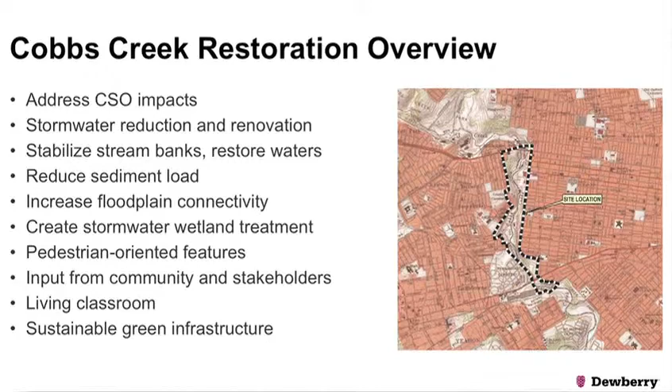It's centrally located. It makes a great opportunity for a classroom and to bring the younger folks in and provide that educational component and get their feet wet and get involved in the project. And they're already doing some things, and so there'll be opportunities as well, and do it in a sustainable manner. I mean, that's typically the approach. So.

Now here you can see, again, we're looking at a watershed approach, and our process in looking at this project and determining what the appropriate fixes are. You really need to take a step back in time and determine what has happened to provide those alterations, get a full understanding of that before you can begin to apply the fixes. And that's something that I do regardless.

Whether you're doing a small rain garden or a large stream restoration, you really need to go back, particularly in these urban areas where there's been a tremendous amount of alteration, because again, you need to fully understand what has changed.

If you're going to be trying to infiltrate within a rain garden, you need to understand: are you going to be infiltrating into bedrock because the ground was up here and it was lowered at some point in time, or has that all been filled? So what's the expectation in terms of the infiltration rates, and what you can do and where you can do it based on some of those constraints, as well as the historical and archaeologic issues that you deal with.

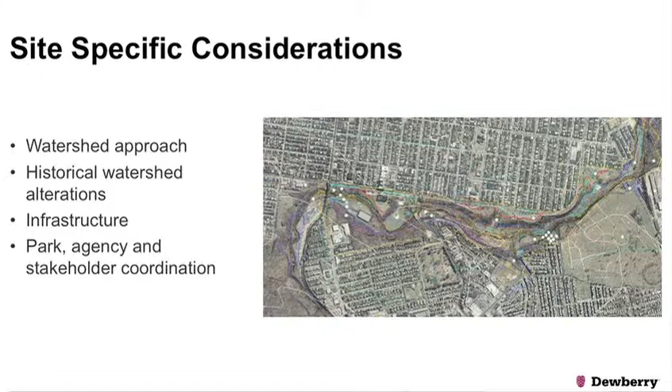And that's historically the way the City of Philadelphia, many of the major metropolitan areas, New York City, pretty much any of the large older municipalities or large metropolitan areas were developed in that manner. You've got to go back in time. Back in the day, they would take the waste material, throw it out into the street, or throw it into the back, had outhouses, whatever, and it was a sanitation issue.

So you developed a sewer system that would treat that. So you take the low points, which were the stream channels, and they were already fouled anyway by that point, and so those became the areas where the construction took place for those combined sewer discharges.

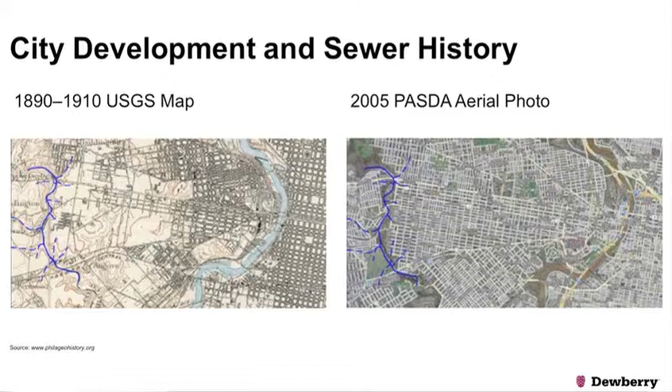And again, looking at the geology of these areas, this is all underlain by Wissahickon schist. Wissahickon schist is a metamorphosed material that weathers down. It's a rock that has been compressed and ultimately then weathers, and it's termed rock flour in a lot of cases. So it's deeply weathered, and when I say deeply weathered, it can be 20, 30 feet deeply weathered, or it can be 8, 9 feet.

But in some cases, I've been involved in highway construction projects where it's weathered as much as 90 feet, and you're trying to put a structure on that, and it gets interesting. But anyway.

And here again, you can see the process of development, the historic streams that existed. This is the Schuylkill River here. That's the Delaware. Oh, you're right. Here's the Schuylkill at this location, and Cobbs Creek is over on the extreme left-hand side here. So you've got the Delaware and the Schuylkill in this location.

But again, historically the stream patterns, and then currently the combined sewer discharges and outfalls. And you can see how that process developed, taking those streams and creating those combined sewer culvert arches: put a form in there, lay the bricks, and concrete the bottom or brick the bottom.

And these discharges would work their way down, and then when they hit the edge of the stream, there's a parallel interceptor. The parallel interceptor is another sewer line, or sewer lines that run on either side of the stream. And under low flow conditions, the material out of those major combined sewer outfalls drops into those smaller parallel interceptors on its way to the sewage treatment plant.

What happens under major storm events is you've got the inlets feeding into the combined sewer system, and you've also got the sewer system feeding into that combined system. It overloads the parallel interceptors, and at that point it backs up in the parallel interceptors and discharges to Cobbs Creek at each one of the 5 combined sewer outfalls. So this was the process that was used to develop these areas.

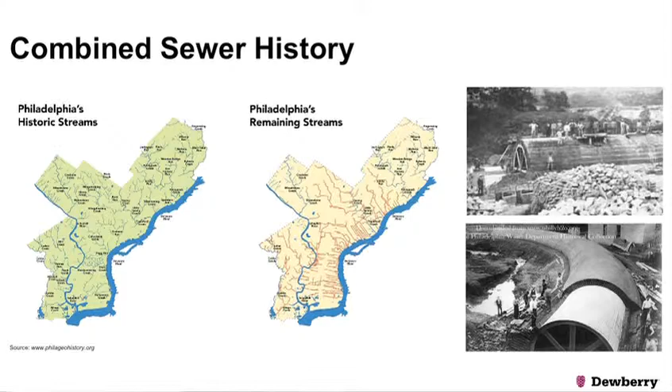Going back historically, what made this possible is that Wissahickon schist material. It's a weathered material. You see pictures of them building brick sewer manholes 20 feet up in the air. What's that? Well, you shave off the high spots because you could readily excavate this material by hand. You put it in a dump cart, and they paid a nickel per single axle, horse-pulled wagon cart.

They gave the fella a nickel, and he might have gotten several loads a day, but anyway, you would bring that and they would fill around the manholes, and that created the level area and shaved off the high spots. And again, that was all by design and by city plan. A plan was developed, and the area developed accordingly, and the sewer and water system to support that infrastructure. And again, that's how a lot of the major metropolitan areas developed.

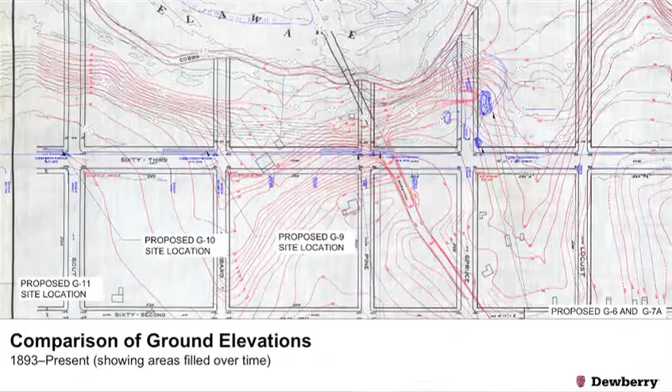And again, here in this location, these subsurface systems, you can pretty much see the higher ground here. This whole area was lowered, and then the other areas in this location here, that was all placed on fill. So again, it also gives you the drainage patterns. If you're going to run into a water table or poorly drained soils, you would expect those to occur where you see those historic drainage patterns. So again, it's going back and looking to get a full understanding.

And the model that we're using, really from a restoration standpoint, is out of New York City's high performance infrastructure guidelines. When I saw this cross section, it's very close to what you would see out there if you were facing south on Cobbs Creek Parkway. You've got the developed area and the potential for green roofs, blue roofs within the city. You've got opportunities on the east side of Cobbs Creek Parkway for various tree trenches, bioretention type systems that work behind the curb. And again, bioretention systems and median.

You've got a combined sewer system here, and then the transportation and the park located on the west side of Cobbs Creek Parkway. It really is a nice cross section, and again, the opportunities that exist, and that's really what we looked at conceptually. The approach we're looking at is to try to disconnect that impervious cover and get it out of the combined sewer system, and use the green stormwater infrastructure to intercept that runoff and infiltrate where possible. Where you can't infiltrate, under drains are incorporated into these systems.

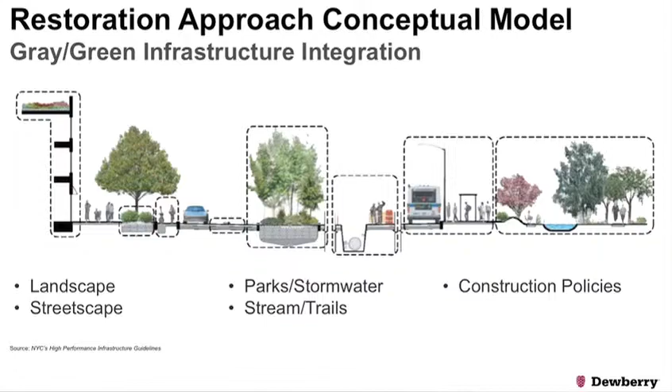The subsurface storage systems have under drains in them so that they'll store the runoff for a period of time and then release it slowly. They act like a detention basin, so at least they will hold that water until the peak discharge passes, and then release that slowly into the combined sewer system. So it's not a volume control, but it's a rate control that at least keeps that discharge out of the combined sewer. And again, then the hillside working down into Cobbs Creek itself. Opportunities for riparian restoration along those areas along Cobbs Creek, and then the green stormwater infrastructure in the level areas just to the west of Cobbs Creek Parkway.

And again, some of the design considerations, and I've talked about some of these previously, the diabase and the metamorphosed limestone or the schistose soils. Again, opportunities and constraints. From a stream restoration standpoint, the diabase is problematic. It's probably one of the more difficult areas to restore because it's just a narrow point, and the fact that it's backing up the discharges. We get some tremendous velocities and shear stress through those areas. So we're looking at these micaceous silts and sands, and Chester Manor Glen Elg soils, and they infiltrate well. Bedrock is deep when you look at the soil survey, and that's the case.

We just finished our infiltration testing, and we've got some pretty decent results, anywhere from 2 to 6 inches per hour, and almost to the point of a little too fast. But the water department uses 1/4 inch per hour as the minimum infiltration rate. That's the adjusted rate.

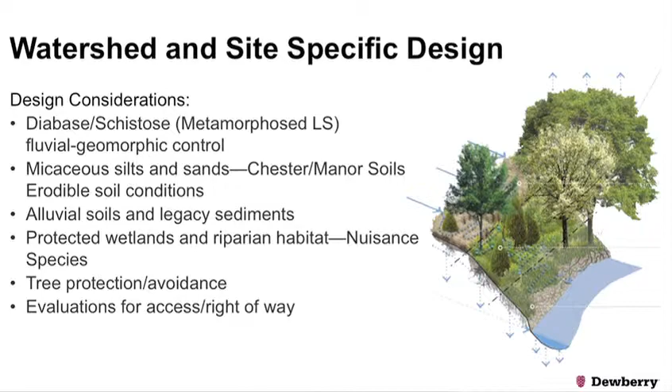Now here you can see this is the area. This is the granitic diabase rock that's located just downstream of Marshall Road, and you see the polished, fresh rock that exists in this location. These are football-sized rock, and that stream has the power to move a rock of that size. So that's what we've got to design for, making sure the stream restoration design is going to have some resiliency to it. That's one of the new buzzwords: sustainability, resiliency. So anyway, that just means we've got to put some big rock in there.

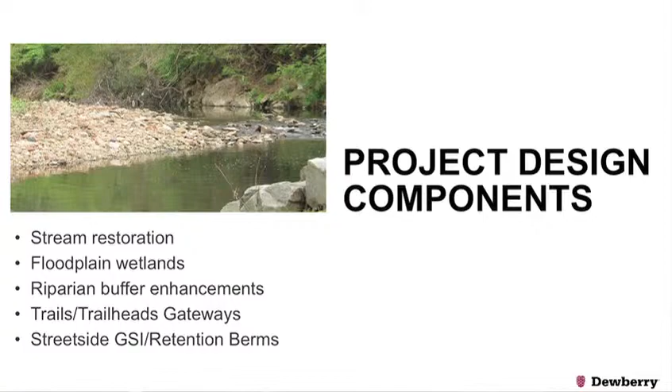The project design components: stream restoration, floodplain, wetlands, riparian buffer enhancements, trails, trailheads, gateways. We have gateways located up along Cobbs Creek Parkway, and then street side green stormwater infrastructure. And natural stream channel design components. Here again you can see there's an indicator of bank full, but you can see the amount of soil that's been washed. There's a steep slope in here, and when the stream comes up, it erodes the lower portion of the slope, and so it's sloughed off a lot of that area. So again, stabilization of the outfalls and development of step pool stormwater conveyances, and floodplain reconnection.

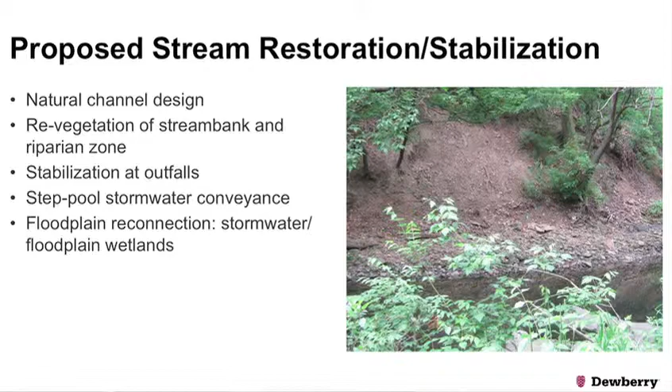Some of the approaches we're using: here's an A vane. It just provides an extra step in there as you come down. We use these a lot on smaller streams. We definitely are going to have some larger cross vanes in here. Looking at the current stream, it is in a lot of cases 30 to 40 feet wide. When you go back and look at the historic mapping, even with the mills that were developed, the stream channel width was 15 to 20 feet. So it's increased in size twofold, and scoured and lowered in a lot of cases.

And I suspect that in the development process, a lot of the rock that might have been in the stream channel was used in the development and pulled out of the stream. That was standard practice. So your resistant material that might have been in the stream channel was used to build homes and farms and whatever. And that's where your incision comes in, and the instability, and the stream can't get out of its banks. So in the assessment process, we evaluated and determined that it has pretty much done what it's going to do. It shouldn't get any worse.

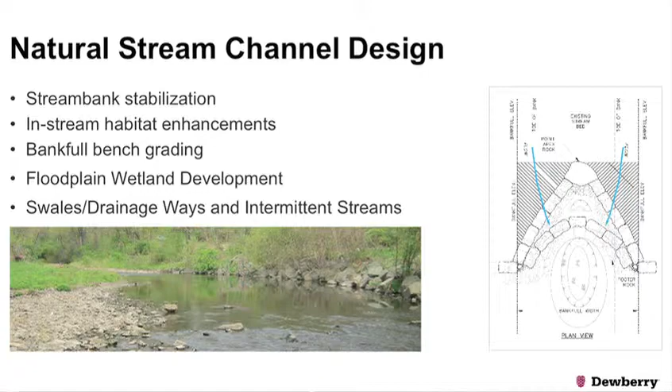It has downcut, and it has widened to the point where it's not anticipated to go any further. So with that in mind, the appropriate fixes are being evaluated. And again, the combined sewer overflows, you can see it's a scour, and so restoration of the outfalls themselves. This is the outfall below Market Street. And again, there's a large deep pool in here, and there are some stabilization efforts proposed for that.

Here you can see, and this is the Delaware County side, there's actually a manhole that surcharges. What happens is when you get the heavy rains and so forth, the water just surcharges and blows up through. It'll pop the lids, except a lot of times they've got locking lids on them, or they'll weld them shut just to keep them from popping. But what happens is that water then rushes down the hillside, creates an erosional gully, and scours its way down through in instability.

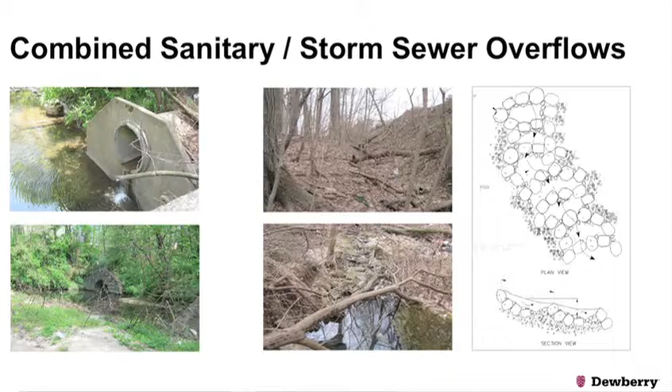So in those cases where you can solve that problem, and most of these you can't because there's a tremendous amount of stormwater. So the intermediate fix is to incorporate the step pool systems for stability, and step those discharges down when they occur. And the reconnection of the floodplain with the stream channel.

Several areas, and again, you look back historically, these are the areas where a lot of the mills were located, and in some cases we're looking at those mill races to try to get the water out into the old mill race areas, the traces of those mill races, to get into these floodplain wetland areas, to create these floodplain wetland areas.

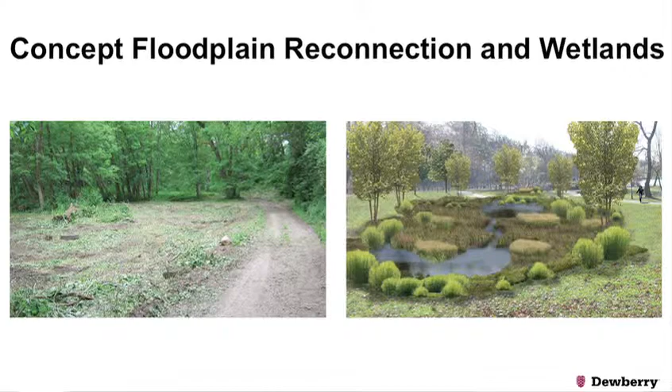And again, the approach is to minimize the number of trees that we take. It's a balancing act. You've got to take a certain number of trees in order to make it economically feasible to get in there and do what you need to do. But anyway, I think we've come to an agreement on which trees. With the ash borer, a number of ash trees have now hit the to-be-removed list that previously were not allowed to be removed. So that's the approach in some of these areas.

All right, and then again, part of the project includes park and trail related green infrastructure alternatives and green stormwater infrastructure. So just a number of the features that we're looking at: the stormwater wetlands, step pools, bioswales and rain gardens, and interpretive educational signage.

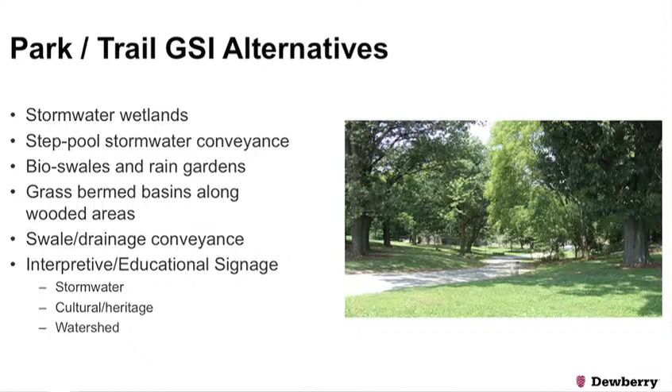This is the access road going down into Cobbs Creek Community Environmental Education Center, and again, it provides a tremendous opportunity for that interpretive signage for stormwater, cultural heritage, a tremendous amount of culture and heritage within this small area, as typically there is, as well as the watershed story, the restoration approach, and the combined sewer. So these are all envisioned for the project as it runs through completion. And some of the concepts.

Now we're not building anything fancy like this, but this is an image that's pretty close in concept to what we're proposing to do. We have a number of areas where we're taking existing drainage hollows and we're going to restore the drainage to those areas with green stormwater infrastructure, bioswales, and so forth along Cobbs Creek Parkway. And then the overflow discharges from those, as well as the underdrains, will discharge to stormwater step pools that'll convey it down the slope and into these rain gardens or small little wetland pockets behind these bermed areas.

So again, then bringing that down into the floodplain, connecting that with floodplain wetland systems. So you're taking that runoff, and when you pull it out of the combined sewer, you've got to safely convey it down the hill because you're dealing with large storms as well as the small storms. So that's the approach we're using to reconnect, to restore that watershed to how it may have been at one point in the past. That's the process.

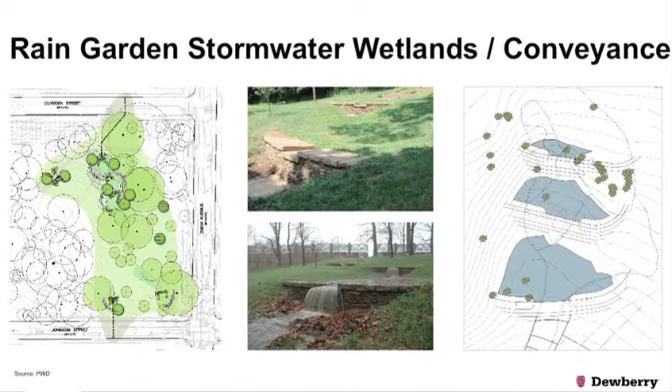And again, some of the areas, you can see this is the typical section, the paved walkway along Cobbs Creek Parkway and Cobbs Creek Park to the west here. This is a small traffic island at Marshall Road. We're going to utilize that, put a small rain garden in that area to pick up some of the runoff from the intersection. And then we're going to, oh, there's already a green inlet there. Okay.

So now we get out there and we see a number of inlets that haven't been maintained in a while, and when they're growing grass, you know they need to be maintained. So, but this is one that actually I think what we found is it was one of those between Parks and the city. Parks Department is actually responsible for maintaining some of the inlets, because they're within the park and the city, and so this is a PennDOT highway, but the city maintains in the PennDOT right of way. So that's why this one got lost in the shuffle.

But anyway, that one was cleaned out promptly, and what we're doing is going to take this small rain garden, put a true green inlet that's going to separate the sediment and leaf material and so forth, go into this small rain garden, come across the ramp road here into a new inlet, take that down the hill into another rain garden in this level area, and then bring that down. There's a rock line ditch that exists, so we're going to bring that rock line ditch back and restore that and provide some stabilization to that.

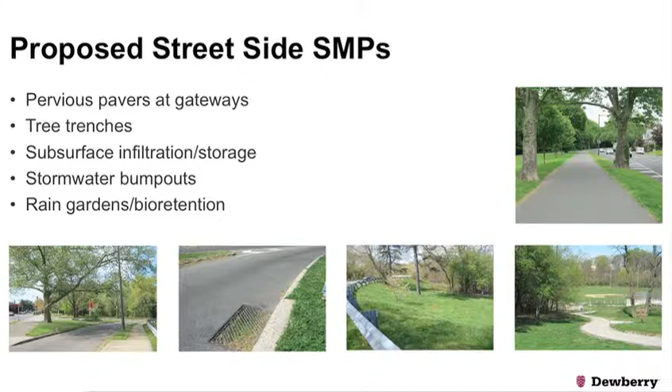So again, we're getting that stormwater and runoff out of the combined sewer, and putting it back on the land and infiltrating it. And we did get some good infiltration results again at this location, but we will be installing the under drain. And here again, you've got a size that's available to you to build this rain garden. We've got trees that we can't take out. We've got a slope on this side, and we're really limited here. We've got volume requirements and the amount of runoff we're getting to this. The only choice we have at that point is to go deeper and excavate and put subsurface stone storage in with the under drain.

So that's the process. These are not your typical front yard rain gardens. We do have some of those where we have small amounts of discharge. But for the most part, these rain gardens are fully designed like a detention basin with all the bells and whistles to function as one should that be required.

And here you can see the subsurface infiltration storage tree trenches. These are examples from renderings provided by the city. They have some new renderings out on their website. You can take a look at those. I like the new ones, but I still like these from the standpoint of being able to see what's happening. I like this approach as well.

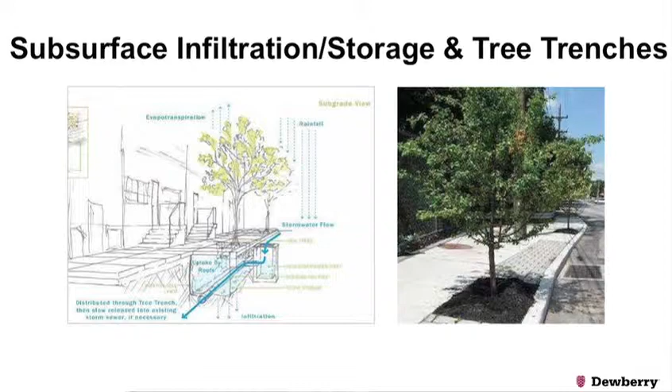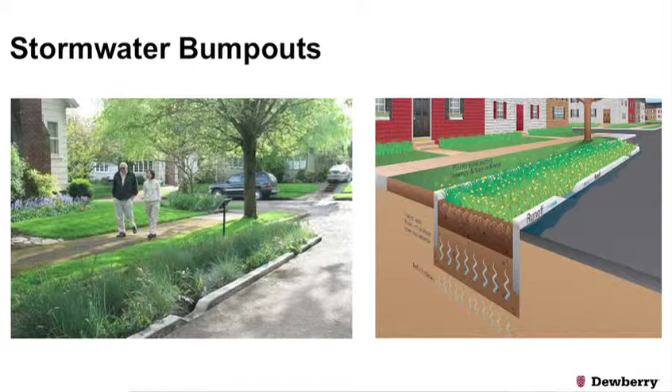And then the curb bump outs, curb extensions. We've got several locations on either side of the Cobbs Creek Community Education Center entrance where we're doing some curb extensions and curb bump outs. Some renderings of how they work, and again, these will also have under drains. We're putting low flow rock paths in them. One of the issues was we had some cobble-sized material designed, and that's really all that's needed from an erosion standpoint. Like, no, can't do that. If it can be picked up and thrown, you can't have it. So we went to this size rock.

So anyway, again, it's the learning curve, and you understand it. You have to understand the environment that you're working in, and there's a reason for that, and there's a safety reason, and so yeah, okay, it makes sense. So almost to the point though, if we go to this large of a rock, what's the cost associated with that, and is that the cost-effective thing to do? Well, it may end up being jettisoned in the end from a value engineering standpoint. So there are cheaper alternatives.

So again, the street side SMPs and some of those options. Again, with the under drains, and you see some examples of those. One of the things that made it difficult, we really have a very narrow tree island here, so that's why we have the subsurface storage systems. The subsurface infiltration storage systems are to be located beneath that 10-foot wide paved walkway, and so this was one of the original concepts. But again, when you look back to how this was graded, everything drains from the park into Cobbs Creek Parkway for drainage purposes.

But this would be the perfect place over here to be able to get that water out of the street and over into this location, except for the fact that the ground is 2 feet to 3 feet higher in a lot of cases. So we went a little bit further where the ground then starts to drop off towards the stream, and those are the areas for the most part we took advantage of our rain gardens, our larger rain gardens. And so we do have some cutting involved in piping to be able to get the water out.

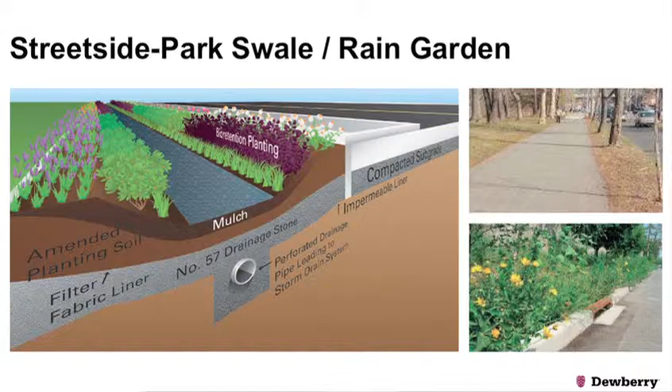And here you can see, this is Market Street, side ramp there, the elevated rail station, SEPTA L, and this is a rendering of one of the rain gardens. It's a small rain garden, not a tremendous amount of infiltration on this. In fact, this is an area that the channel, the drainage way, actually did flow through at one point. The CSO outfall is down gradient about 50 feet. But this is a small system. It doesn't have a tremendous amount of runoff going to it, so it'll work fine. And we have a spillway built in, and that'll be safely conveyed down and back into the stream channel. It just gives you an idea.

Now, the other thing going on here that we don't have shown is there's a gateway being developed in this location where we'll do some small landscaped berms and pavers. We wanted to use pavers in here, but again, for maintenance reasons, they'd rather use the stamped asphalt. It's not a tremendous amount, and with the berms that we're creating, we've actually got a system design where we're taking the runoff from that walkway in the paved area and dropping it into a rock-filled trench and feeding that back into the base material underneath. So we'll put a thicker base in this area, so it'll still infiltrate. And again, there's always a way of achieving the end result. You may have to take a little longer path in order to get there.

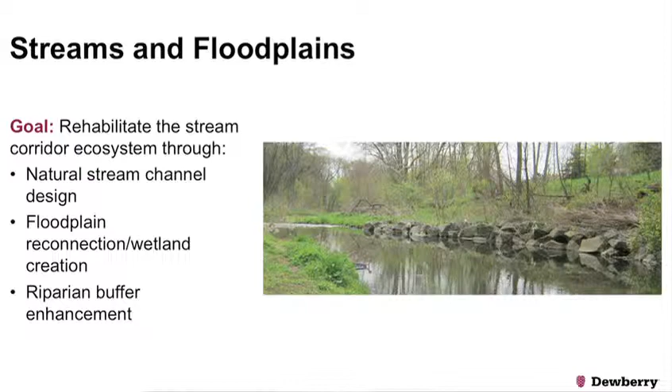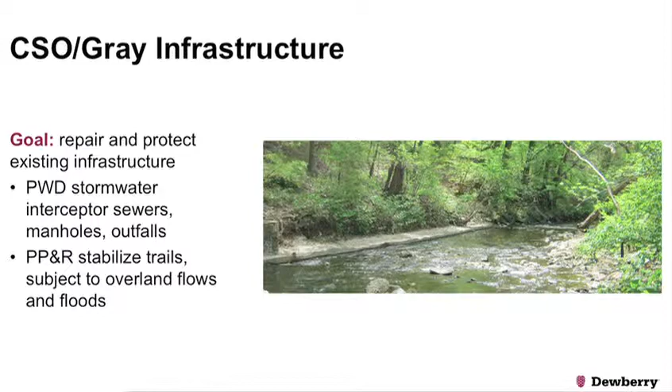So in streams and floodplains, really the goal is to rehabilitate the stream corridor ecosystem through natural stream channel design, floodplain reconnection, and riparian buffer enhancement, and repair the existing infrastructure where you have those facilities. This is a parallel interceptor that's right along the edge of the stream channel. And so there are restoration measures proposed in that area. The reason that was encased in concrete was because the channel had scoured and cut down to that parallel interceptor.

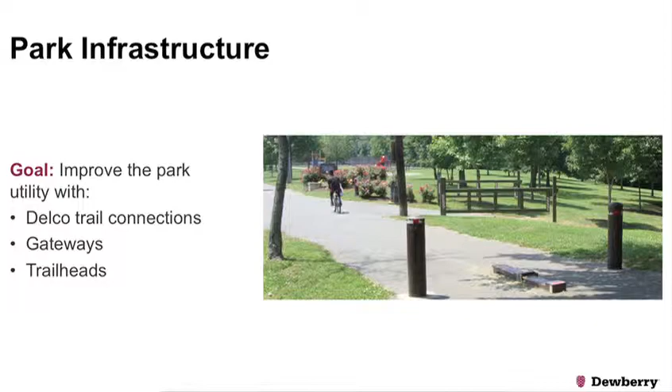And the goal is to improve the utility of the park with the trailheads and gateways. We're creating about 5,000 feet, about a mile, of new trail, and a significant amount of restoration on existing paved and unpaved trails within the park. There's the maintenance access trail that runs the length of the park, except for the area above Marshall Road. That's the piece that we're adding to tie the system together, bringing it across at a footbridge at the Cobbs Creek Community Environmental Education Center.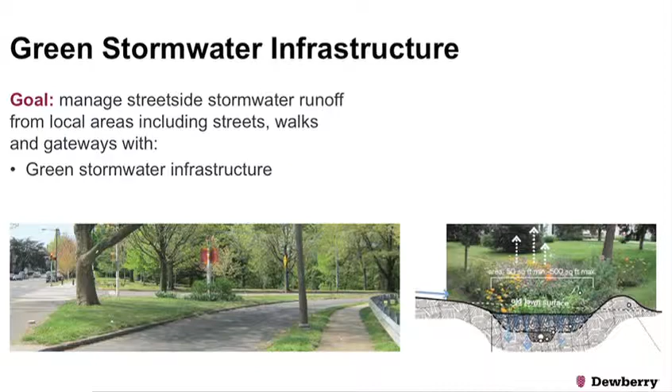And again, anytime you develop the riparian buffer restoration plan, that's a big part of it, make sure you include a management plan, herbicidal treatments, and yeah, you got to get in there and you got to use herbicides. Some of this stuff is so nasty that you could sit there and pull it till you're blue in the face, and it'll still come back as vigorous as before. Yeah, exactly. And that's it, if there's any questions.

Yes? My name's Julie. I work for the Tacony Frankford Watershed Partnership. So we work on the Tacony Creek Park, on the other side of the city. So I was just curious to see what you had learned and what the water department had learned from the stream restoration in Tacony Creek Park that they've already done. Quite honestly, I haven't really looked at that. I know there was a piece of restoration work done on that previously, and I haven't seen the most recent.